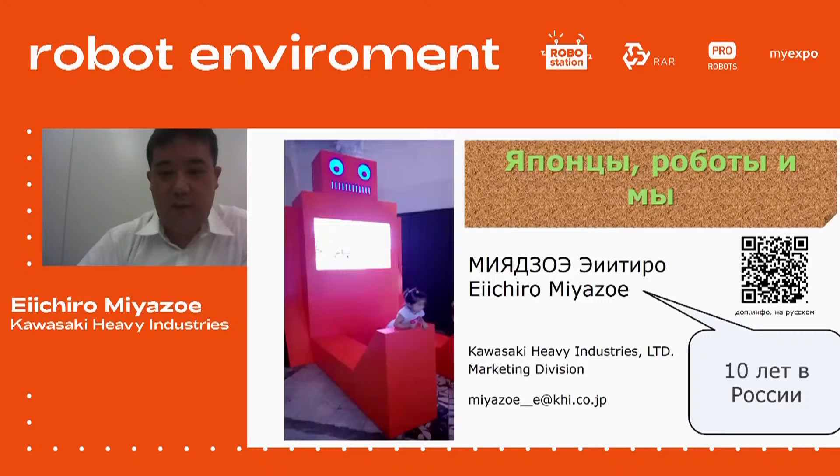You speak excellent, amazing Russian, Miyazoe-san, it touches straight to the heart. I've been living in Russia for 10 years, and I can speak about Russia a lot, but the topic is different. I would like to speak about the fact that Japanese manufacturers of industrial robots take more than 50% of the overall global market. Why? The question is why.

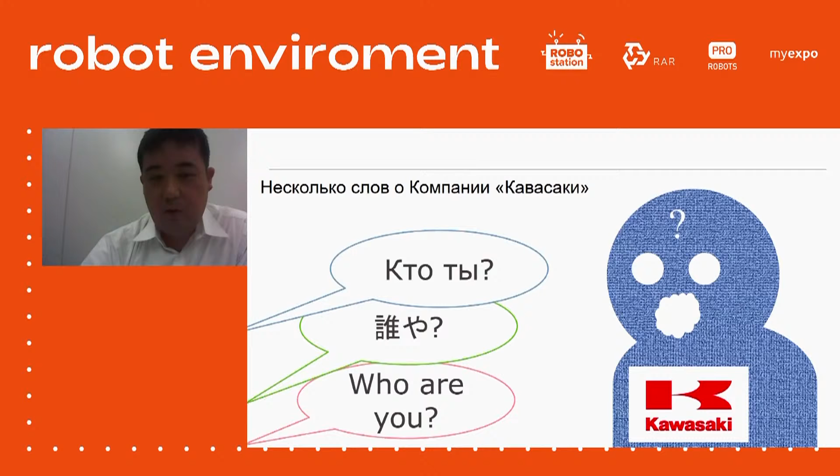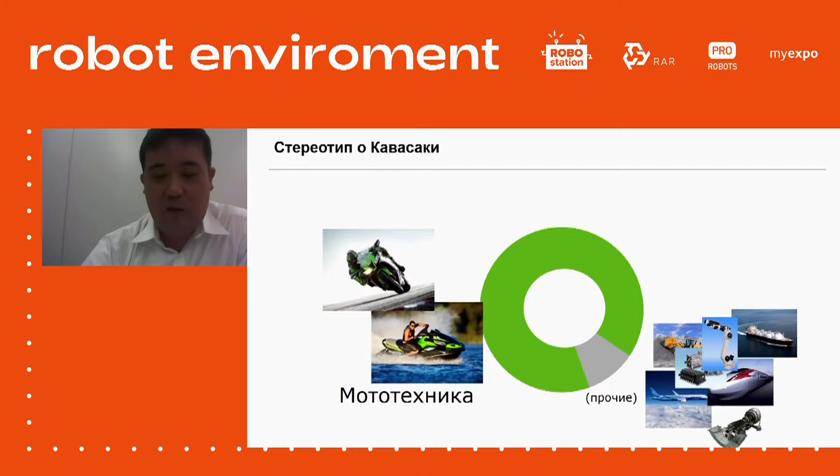And I would like to highlight who we are and what our company does. A couple of words about Kawasaki company - who we are, in 3 languages. Some say that the majority of Kawasaki products are about motoring devices - yes, the Kawasaki motorcycle brand is very strong, but our company is very multifaceted and our portfolio is very diversified. We manufacture ships, trains, airplanes and their components, different compressors and pieces of equipment. We construct plants and we work in the motoring industry.

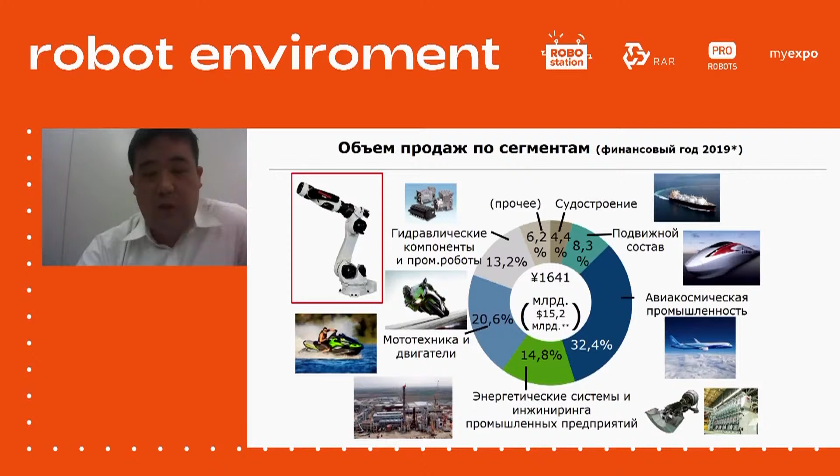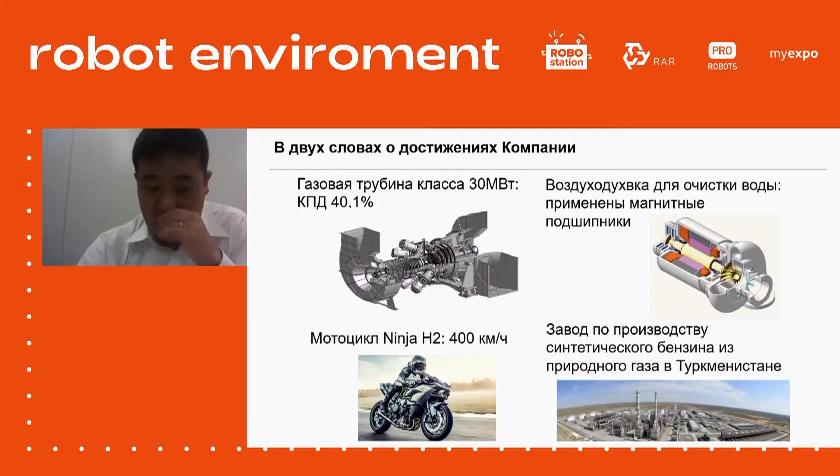But the most important thing for today's topic is that we manufacture industrial robots. We have gas turbines, we have motorcycles, we have water treatment equipment, and we are constructing a plant in Central Asia.

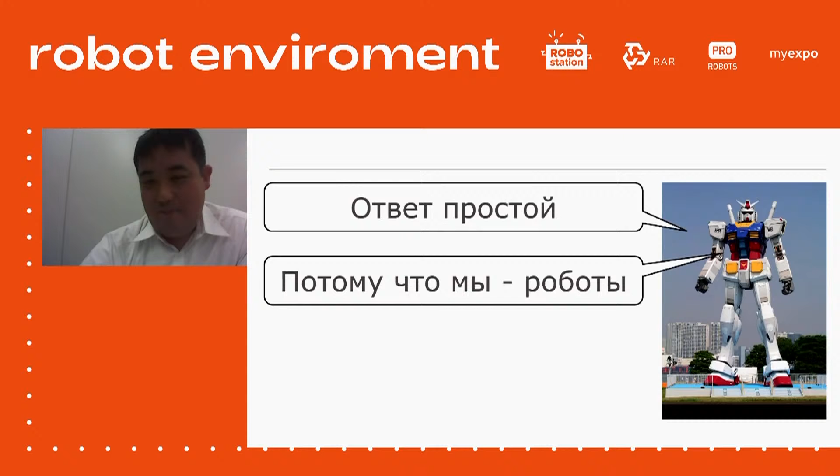So I go back to today's topic. The market share of Japanese robot manufacturers is more than 50%. Why? The answer is very simple - because we Japanese people are robots. No, that's not true, that's actually a joke. Take a look.

Japan has 124 million inhabitants - in terms of population, we're a bit smaller than Russia. In our industry we have automotive manufacturers Toyota, Nissan, and Honda, Kawasaki and Mitsubishi in industrial manufacturing, and in electronics we have Panasonic and Sony. Alongside that, we have manufacturers who construct industrial robots - us and our esteemed competitors, other manufacturers A, B, and C. So in our tiny, tiny country, we have both heavy industry and manufacturers of industrial robots.

We purchase robots from them and give them feedback, and they give us back better robots that are even cooler, even better. This is the logic chain that we have, and this is the main reason why Japanese manufacturers account for 50% of the global market.

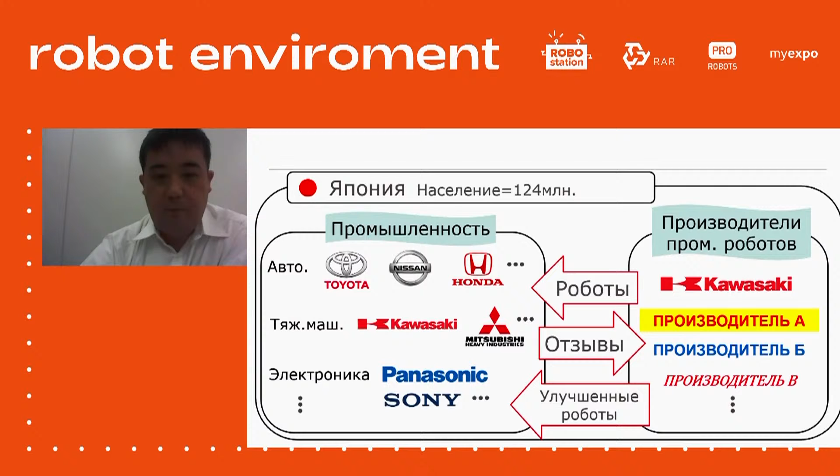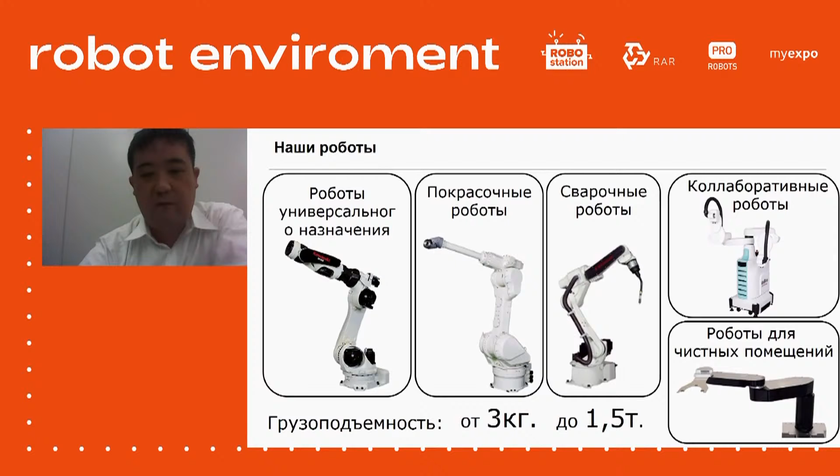And what about our company? This is the range of our robots. You can easily access this information on our website. Our robots can lift from 3 kilos to 1.5 tons in charge.

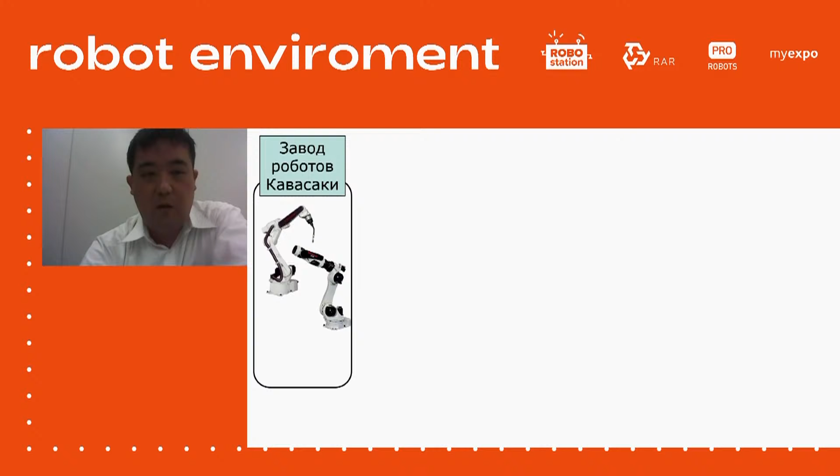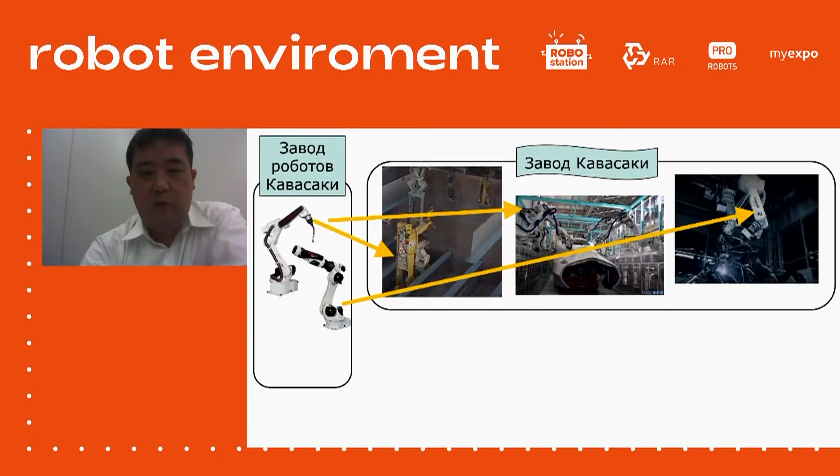Within our company, the situation mirrors the situation in the country. We have the factory where Kawasaki robots are being manufactured, but we also have our plant that manufactures different high-tech products, so we use our own robots to manufacture our own high-tech products. The plant staff provides us with feedback saying this is not working very well, this you need to improve, and so on. This is the loop of constant improvement, the way for us to guarantee it.

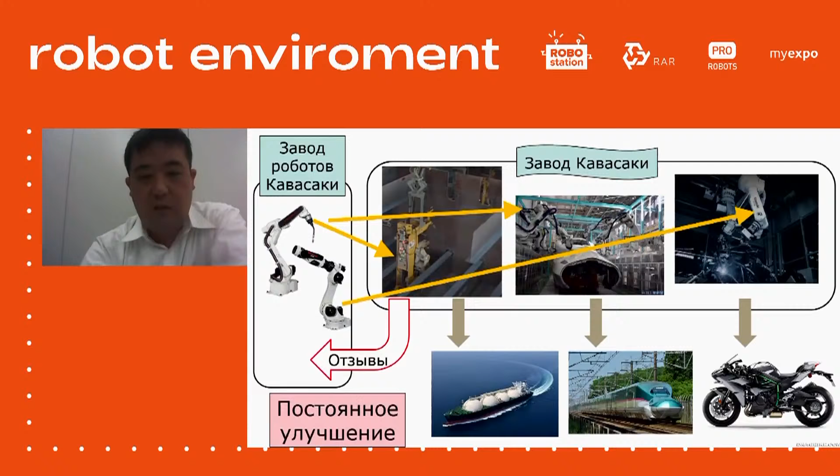So the same logic, the same chain is here. To my mind, this is the secret of success of the Japanese industrial robot manufacturers.

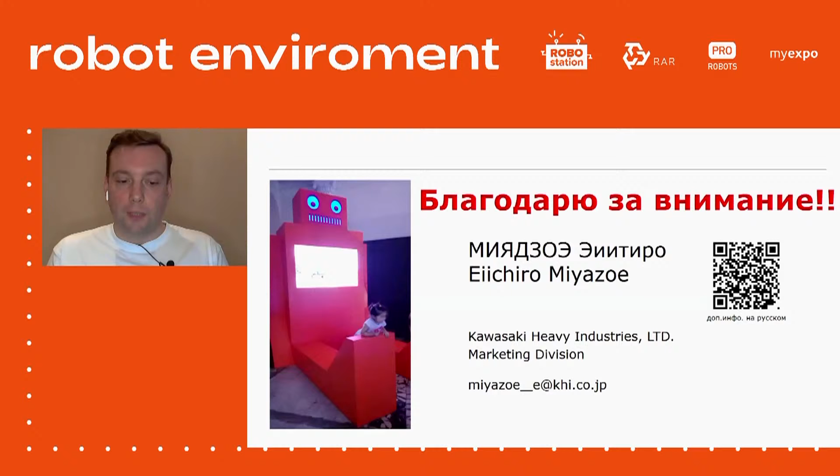Does it answer your question, Alexander? Yes, Miyazoe-san, wonderful presentation. Could you please elaborate on service robots? It's a very interesting topic.

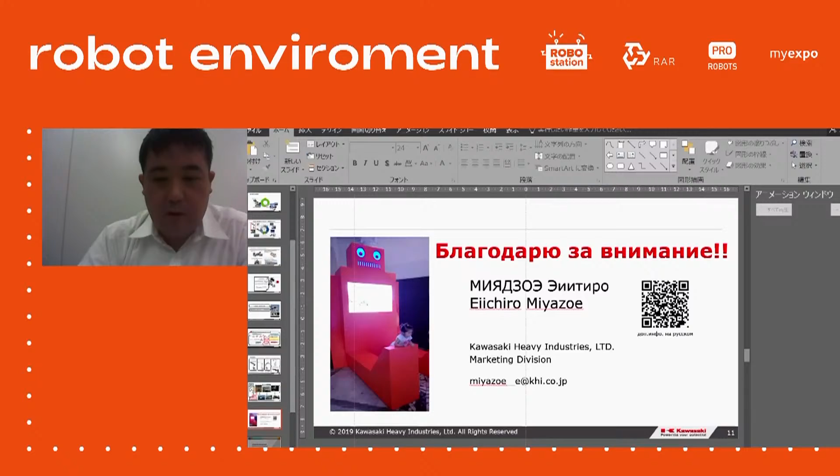Could you please turn on my first video? I had 3 of them. We will launch them in the order that you sent it to me. Could you please skip this one and go to the next one? Please continue. Yeah, oh yeah, this is the right one. Wonderful.

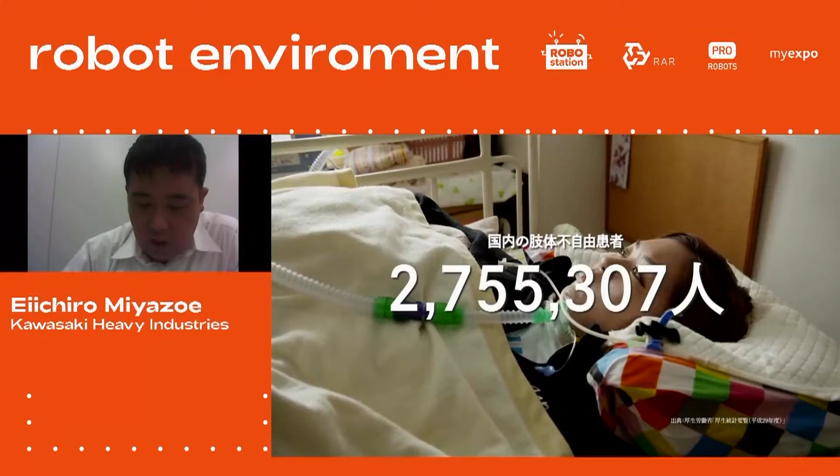This describes the situation with the service robot. It's the robot avatar, and people with disabilities can work remotely and take part in social activities. It's a cafeteria with robot avatars around.

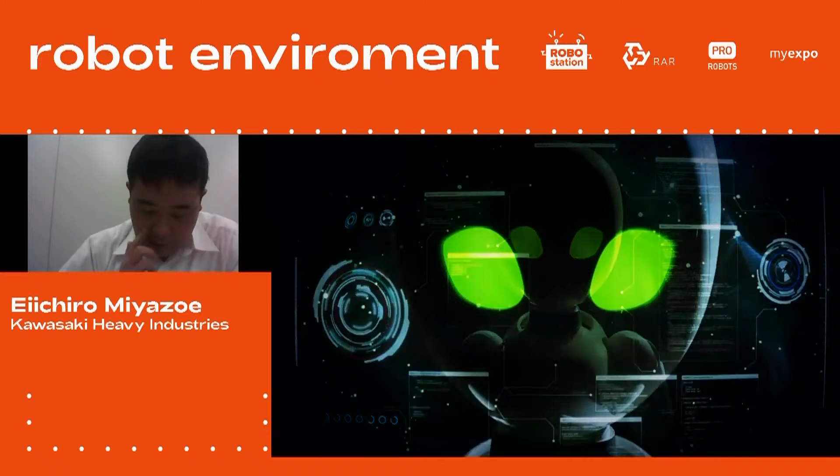I'm sorry, Miyazoe-san, can we launch the third video because it is more related to what we are hearing? No, this one is the right one. I'm sorry, this is the right one.

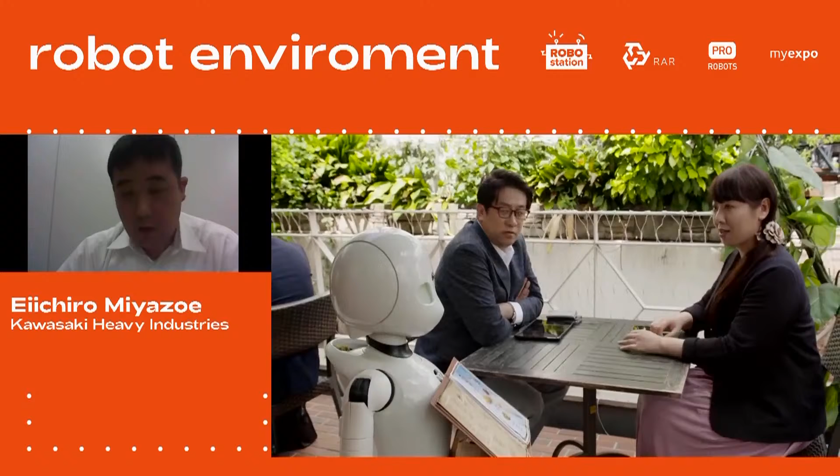9,500 people have a disease that prevents them from actually participating in social life. They are chained to the bed, and they can guide the robot using their eye movement.

These robots serve food and drinks in cafes and cafeterias, and people lying on the bed can see the world through the eyes of this robot. So the robot offers some coffee, brings the coffee, and receives a payment. They say thank you, and these disabled people can not only earn money, but be involved in social activity. This is a brief description of the situation with the service robot developed by this startup.

So in a nutshell, this is it. Thank you very much, Miyazoe-san.

I would like to say that maybe our viewers are interested to know why Japanese people tend to love robots. Maybe you can describe your attitude towards soulless items, and it will bring us to better understanding why Japanese people have different attitudes towards robots as compared to Russians, for instance.

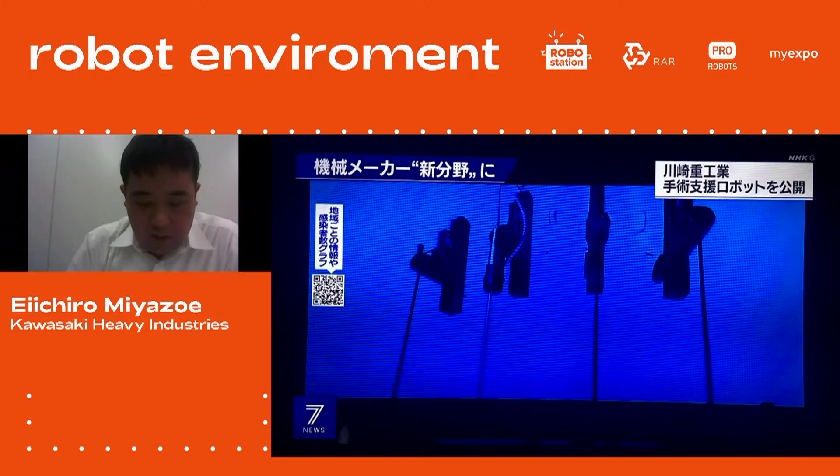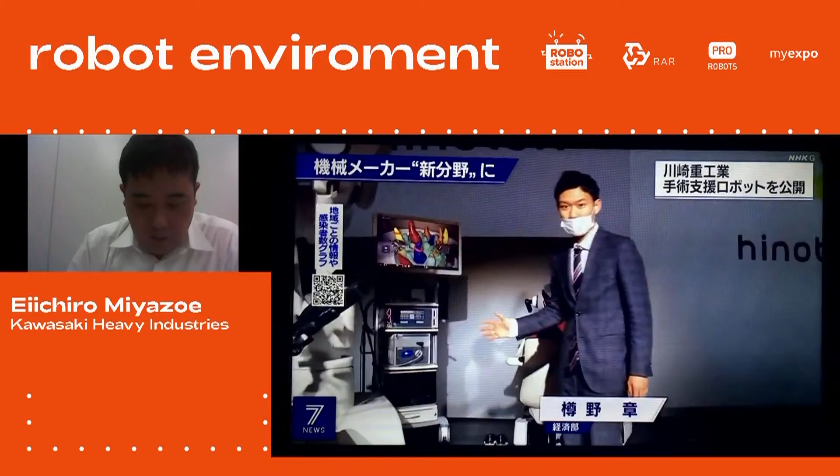This news came November 18th this year about our new innovative news on the heavy machinery industry in Japan. They keep diversifying their portfolio because their traditional products are in less demand due to COVID. Kawasaki, together with partners, produced the robot-assisted surgery system. It was know-how in robotics for such a surgery.

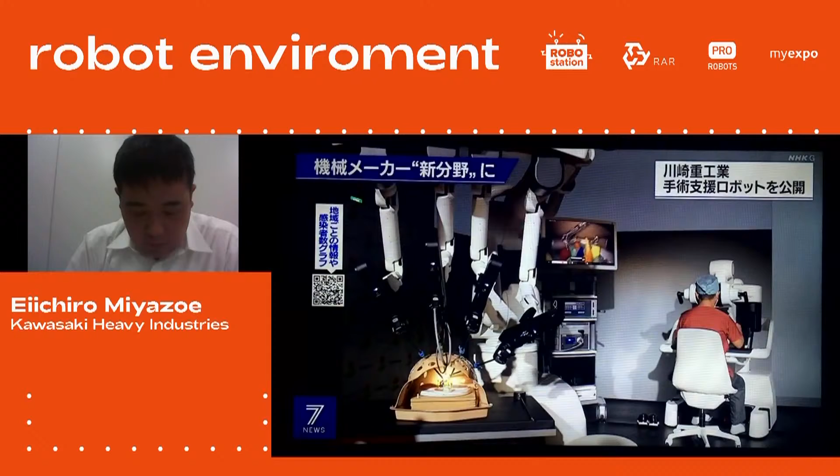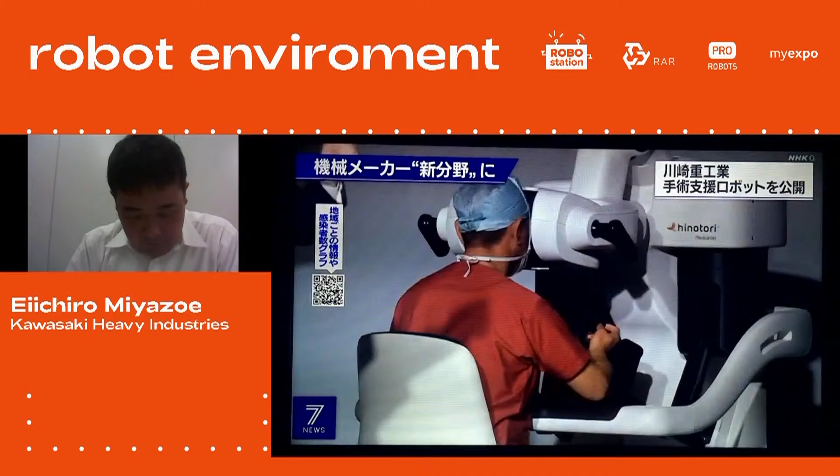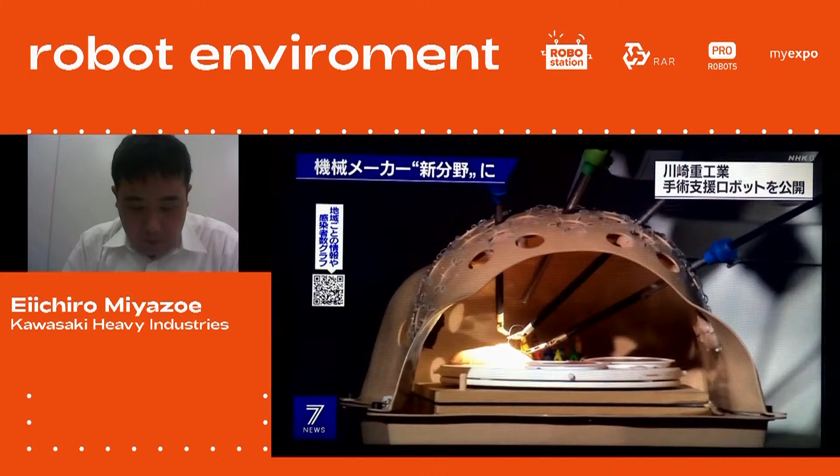And the results proved that the person who inspected our robots saw how smooth the robots work, just like real doctors. This robot is equipped with a function of remote control. According to the data of the Ministry of Healthcare of Japan, this is the first case when a Japanese robotic industry company obtained permission to produce a robot which could assist surgery doctors.

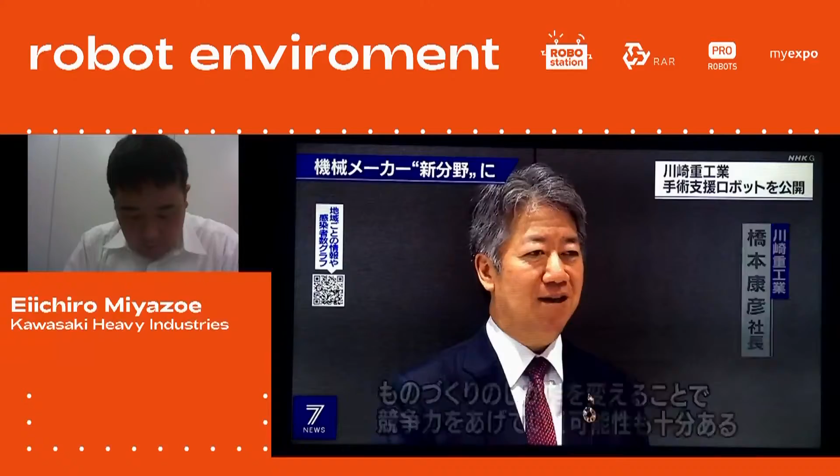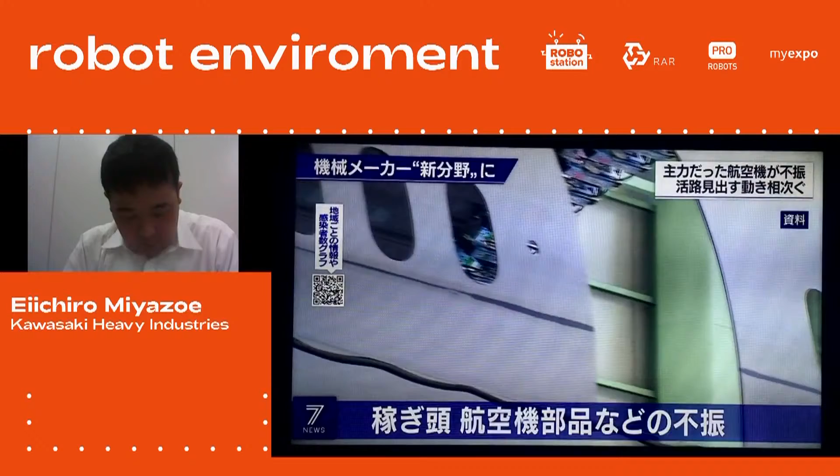Air and space industry components, which is a traditional area for the company - this year we faced a sharp decline due to the COVID situation, and it gave an impetus to strengthen other business areas, including medical robots.

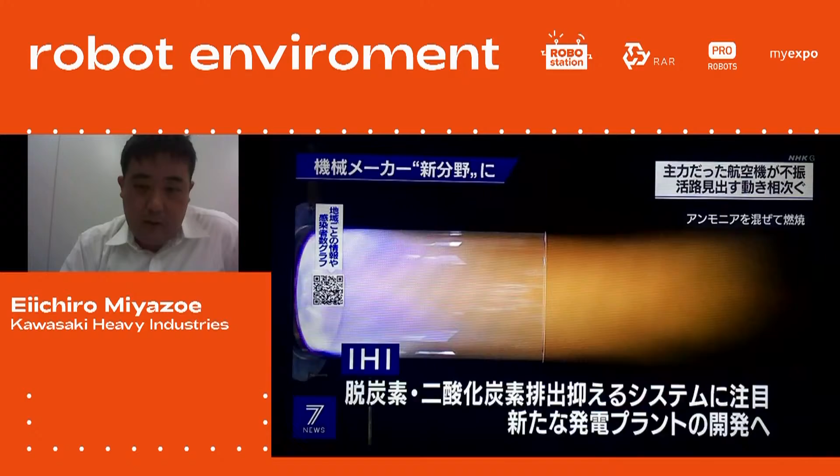And news not only from Kawasaki companies, but the situation with our colleagues from IHI. They produce robots, and they have problems with sales of traditional products as well. Now they are extending the business scope to survive in the post-COVID situation.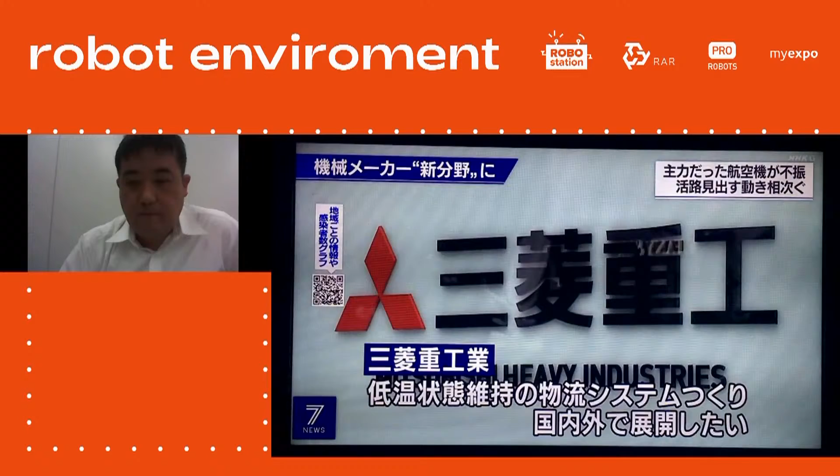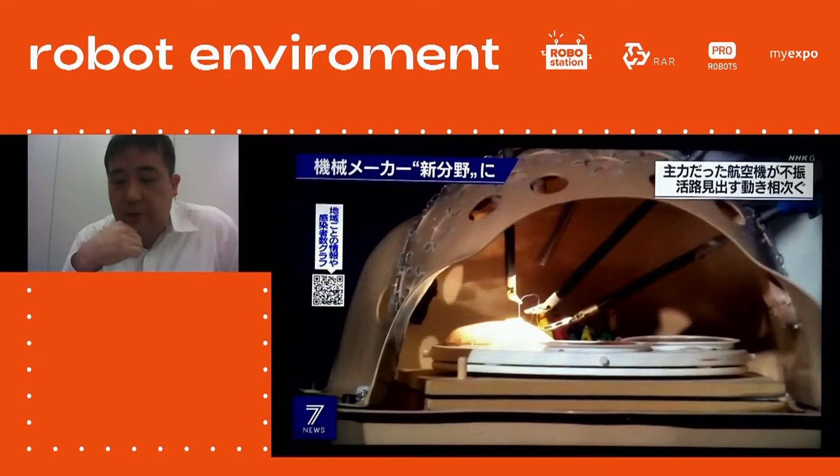In the middle of the video, you saw the machine and the person from our company. This is the president of our company who developed a robot for production of electronic components and semiconductors. When he was a kid, he dreamt of such medical robots which could undergo surgeries, and on his website he confessed that he dreamt about this because he was watching cartoons in childhood where robots were friends of humans.

Thank you very much, Miyazoe-san. Robots and people have to be friends and interact. First of all, robots are aimed at helping people.

I have a brief question. These manipulators, are they Kawasaki manipulators, standard manipulators within the surgery robot, or were these manipulators designed especially for this surgery? These are our robots' arms, robotic arms.

Of course, this requires a high level of accuracy, and since we have experience in production of robots working in sterile premises, which are used for production of semiconductors, etc., this experience can directly be applied for medical surgery robots. Thank you very much.

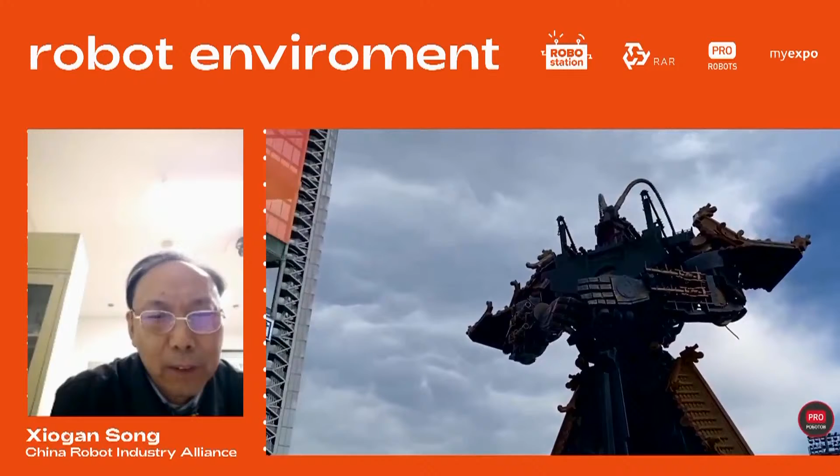First of all, the labor cost. Compared with the Southeast countries like Vietnam, Malaysia, the labor cost is much higher than that kind of country. That is, the labor cost used to be cheaper. That was 10, 15, maybe 20 years ago. That was the case, but it's not the case anymore.

Another factor is that there are so many different manufacturing sectors, like foundry, heat treatment - this kind of industry where the working environment is not so good, high temperature and heavy duty job. So that kind of job is no longer for the younger generation.

So two reasons: one reason is that the labor cost is higher than before. Another reason is that the younger generation is more likely to want to work in the office, and does not want to do the heavy duty jobs.

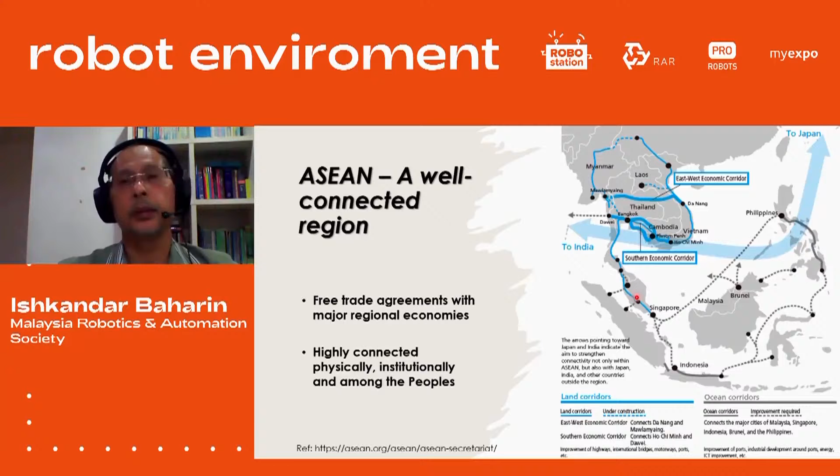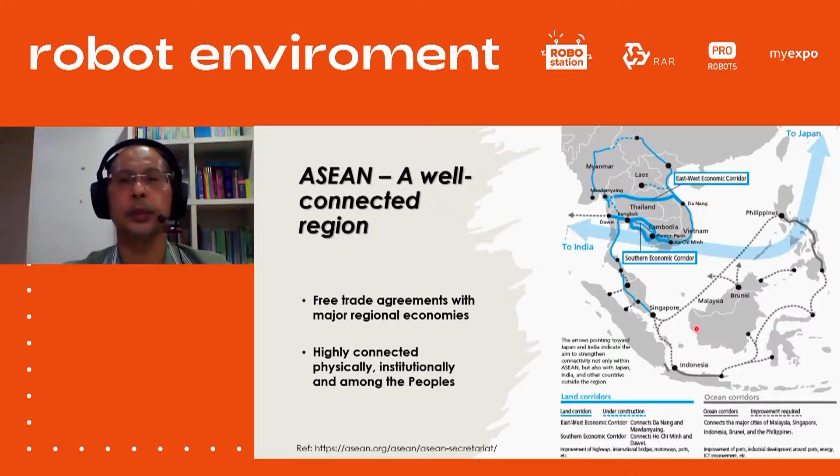This is Malaysia, a population of 30 million. Originally, there were a lot of robots used in factories by multinational companies. Now robots are being used in other sectors, because some Malaysian companies are also operating in other ASEAN countries. So we're seeing more robotics applications from Malaysia being transferred to Thailand, Indonesia, Vietnam, and also Philippines. So when our Russian market looks at the ASEAN countries, looks at Malaysia, try to think that Malaysia is a network connected to bigger countries, the ASEAN countries, which are well connected.

In terms of ASEAN, we are the 6th largest economy in the world. This is where Malaysia plays an important role in ASEAN. The first economy is the US, followed by China, Japan, Germany, United Kingdom, followed by ASEAN. We are also the 3rd largest market in the world in terms of population. China has 1.4 billion population, India has 1.3 billion, ASEAN has almost 635 million, followed by the EU and also the US. This creates a huge robotics market for Malaysia.

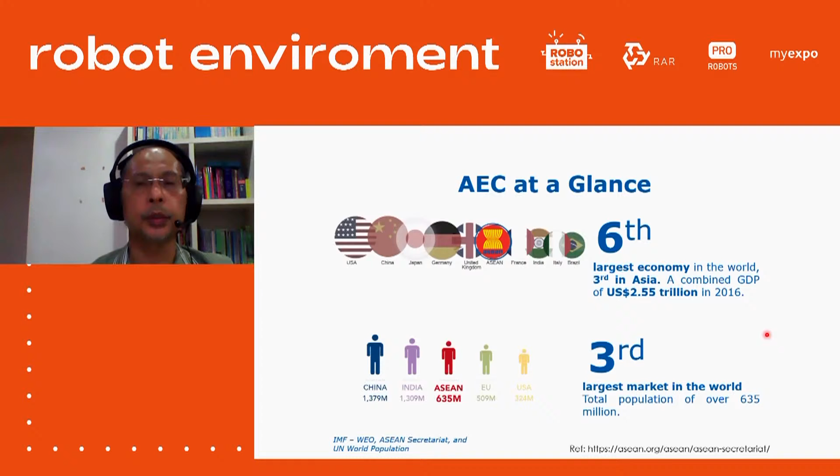In terms of foreign direct investment, there's a lot of investment coming from Europe, from EU countries, 33%, followed by within our ASEAN countries itself. So like Malaysia, we invest in Thailand, we invest in Indonesia, we invest in Vietnam. The same thing in US also, there's a lot of investment into ASEAN, followed by Japan and China.

When we do business in Malaysia, through Malaysia we can connect to the ASEAN countries, and we also have other collaboration agreements like under the ASEAN Free Trade Area, we have the ASEAN-Japan agreement, the ASEAN-China agreement, the ASEAN-Korea agreement, the ASEAN-India agreement, and also the ASEAN-Australia and New Zealand agreement. Recently we have just signed the RCEP agreement, and also we are now negotiating the ASEAN-Hong Kong agreement.

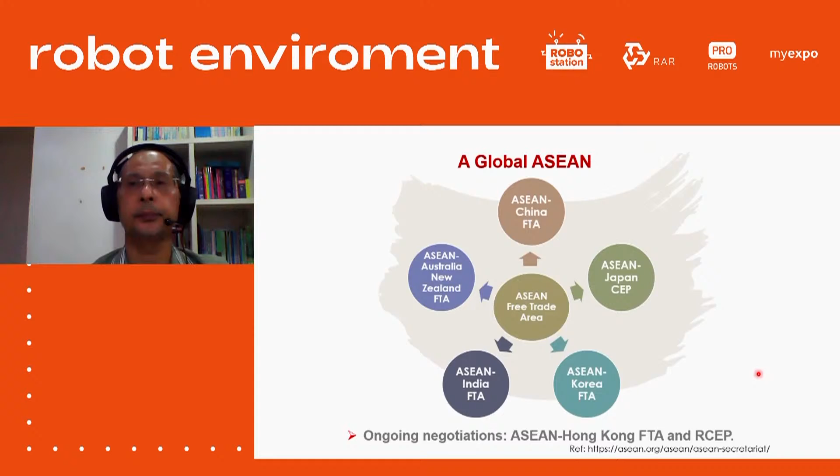Very quickly, we are the biggest crude palm oil producer, so we are seeing a lot of robots going to be applied in the plantation sector. In natural rubber production, Malaysia is the greatest exporter of rubber, especially now during COVID, so there's a lot of production and a lot of robots in this type of factory. Also in agriculture, there is a lot of rice production, so we are seeing more and more robots being applied in the production of rice. And also in the seaports, there's a lot of logistics robots now at the ports.

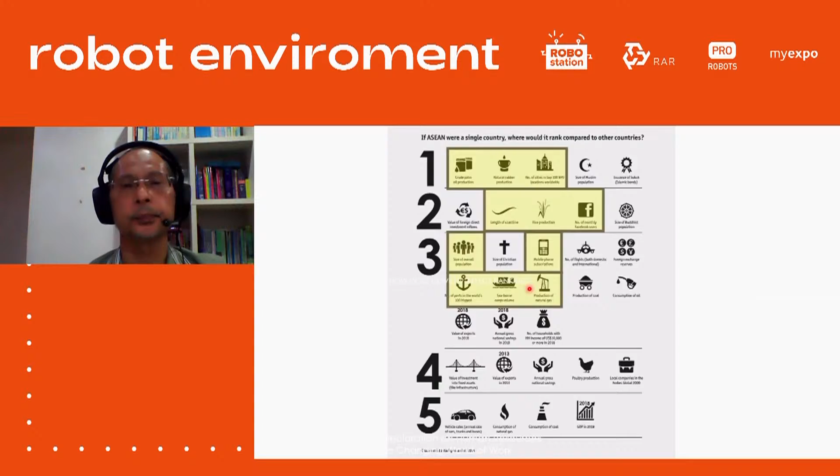Just to share in terms of where robots are being used in ASEAN, for example in Singapore, 20% of the GDP contribution is in manufacturing, so robots I believe are a lot used there. But for Malaysia, these are the main users of robots, which is mainly in manufacturing.

Robots are being used in the manufacturing sector. Number one is the automotive sector, that's the main user of robots. Number two is electrical and electronics. Number three is pharmaceutical. Number four is the food industry.

So if I can share, what is the reason why people in Malaysia, or maybe in ASEAN in general, want to use robots or want to go into IR 4.0? 70% are saying that they want to improve their business process and productivity. 41% because they want to improve their customer experience, because when you use robots, the products are more quality and more accurate. 36% use robots or IR 4.0 because of cost reduction. And 28% is because they want to develop new revenue streams, because when they use robots, they can produce other products, other high mix, low volume kind of activity.

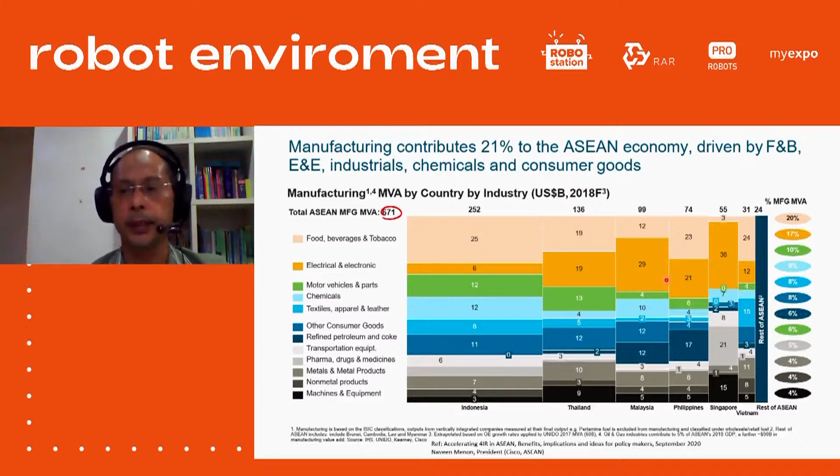In terms of what is at stake, in Malaysia we know that if we don't use robots now, there's difficulty in labor and also competition in technology in IR 4.0. So in ASEAN countries there's a lot of support for factories to adopt IR 4.0 or robotics, because if you don't do this, about 250 billion of our opportunities will be lost. By 2028, predictions by the World Economic Forum, UNIDO and others show this is the opportunity loss if you don't convert to robotics.

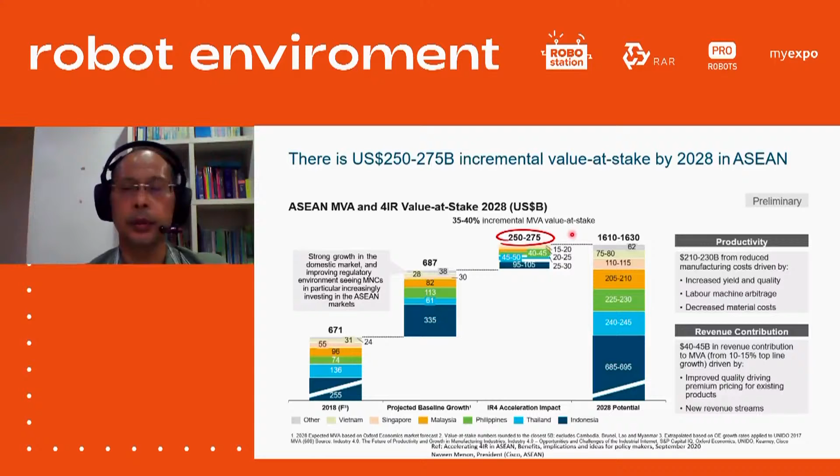At the same time, because we introduce robots, a lot of people will be displaced. For example, in Malaysia, because of robotics, automation and IR 4.0, we predict 1.2 million will be out of job, which is 7.4%. In Indonesia, about 9.5 million will be out of job, which is 8.1%. In Philippines, about 4.5 million people will be out of job, which is 10%. So if you look at the top six ASEAN countries active in manufacturing, everybody will be losing workers' jobs, but it doesn't mean they are truly lost - they will be retrained and redeployed to other sectors as factories become more automated.

So this is the next program.

Finally, I would like to share one model where Malaysia and Korea are collaborating, how Malaysia robotics and Korean robotics are now collaborating. Between Malaysia and Korea we have a government to government agreement, the bilateral industrial cooperation agreement, between our Ministry of Trade and the Ministry of Trade of Korea.

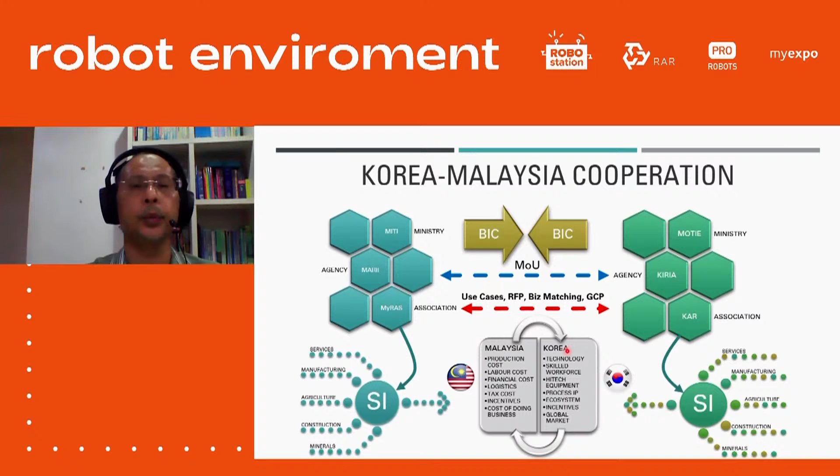So we are looking at five sectors: services, manufacturing, agriculture, construction, and minerals. I would like to invite our friends from Russia, and maybe from China and Japan, to consider this bilateral industrial collaboration model to explore robotics collaboration between our respective countries, where through this collaboration framework, with Malaysia we can enter into the ASEAN market.

So I think that's all that I can share.

Thank you, I will stop there. I have a very short video just to share with the audience a bit about the digital transformation that is going on in ASEAN countries.

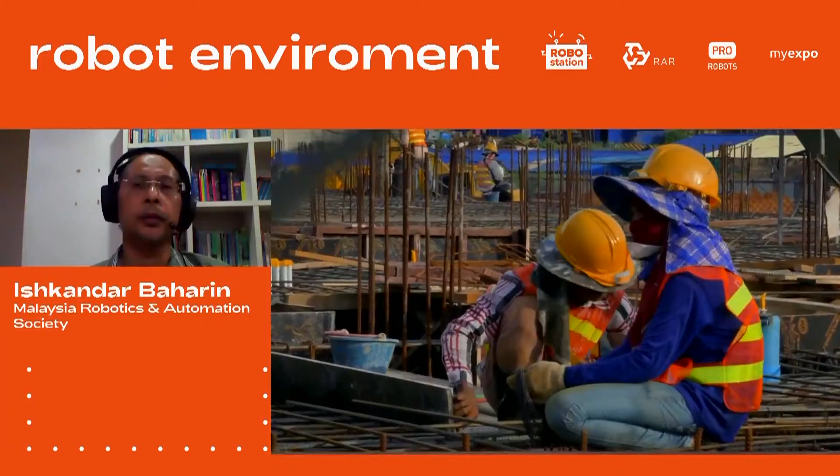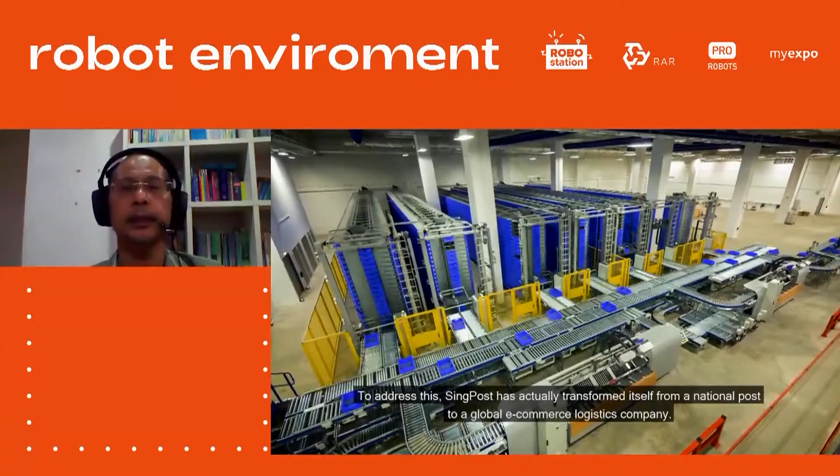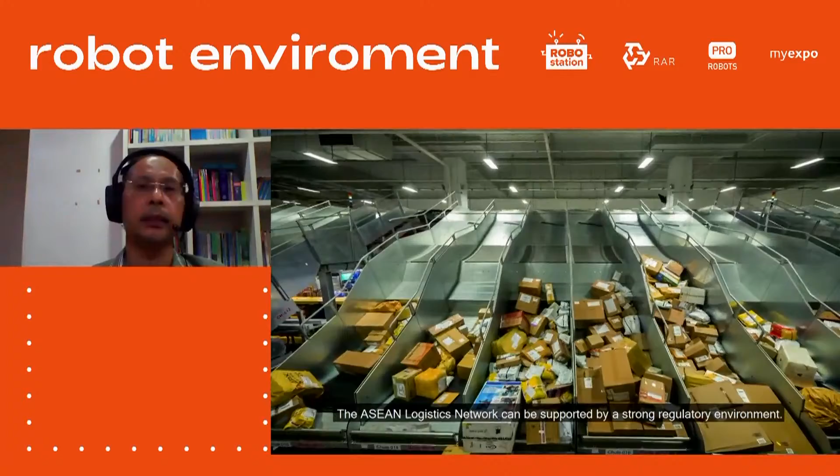So this video, because when you talk about robotics, the digital network is very important. Now Malaysia, Singapore, Indonesia have all developed a common digital framework such that our manufacturing and connectivity is good. Starting from Singapore - I think our friends from Singapore will talk more on this - Singapore is championing the logistics sector, because the logistics sector uses a lot of robots and digital technology. Connectivity is very important, so Singapore is like our logistics hub for the ASEAN countries.

In Malaysia we rely on the network, the port services of Singapore.

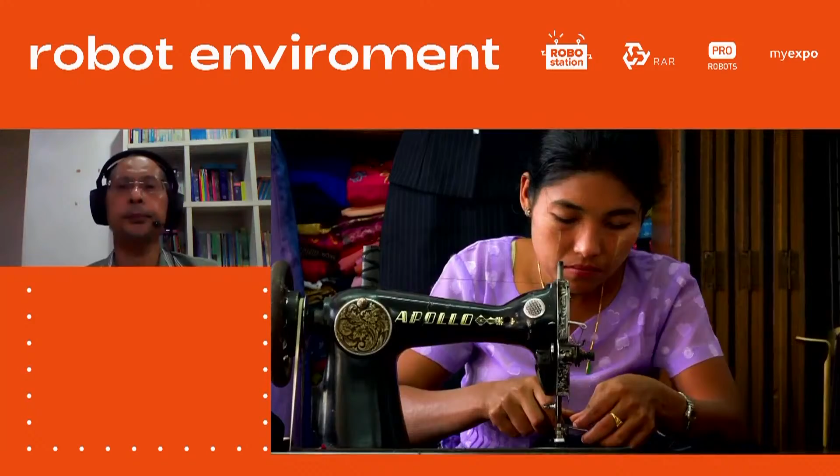The next one is agriculture. You will see that now a lot of people are using their handphone as the means of communicating with outdoor activities. So we are seeing in Malaysia more people using their handphone to control robots.

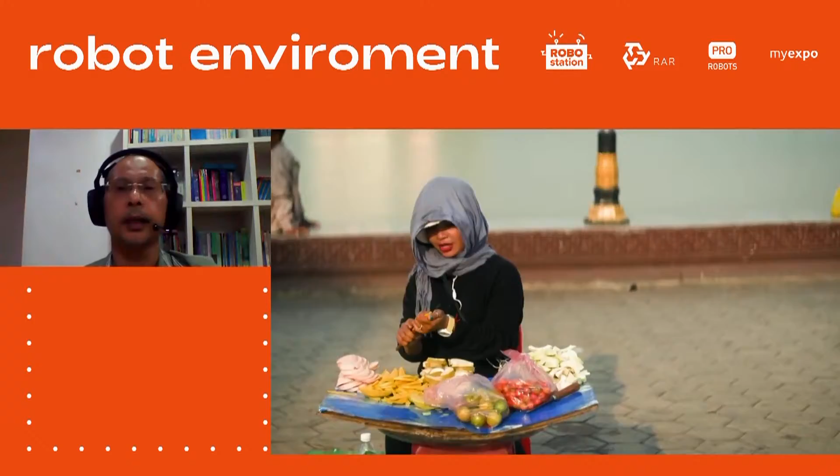These are robots outside the factory. For example, robots are being used for drone applications and for supermarkets. This young generation will use their handphone to communicate with all these robots, just like traders are now using handphones. In Malaysia, there is now what we call the cooking robot, slowly being developed by the young generation. Malaysia is famous for our food, so we are going to see a lot more cooking robots soon.

The other one is SME. Malaysia has been given the responsibility to develop the SME for ASEAN. So you will see that a lot of the experience of SME in Malaysia is now being exported to the ASEAN countries. I myself am very active in helping Malaysian local SMEs adopt robots, to use robots. So if any of the Russian, China or Japan delegates would like to do business with SMEs, you can talk to MyRAS, and we can share the SME experience in the ASEAN countries as well.

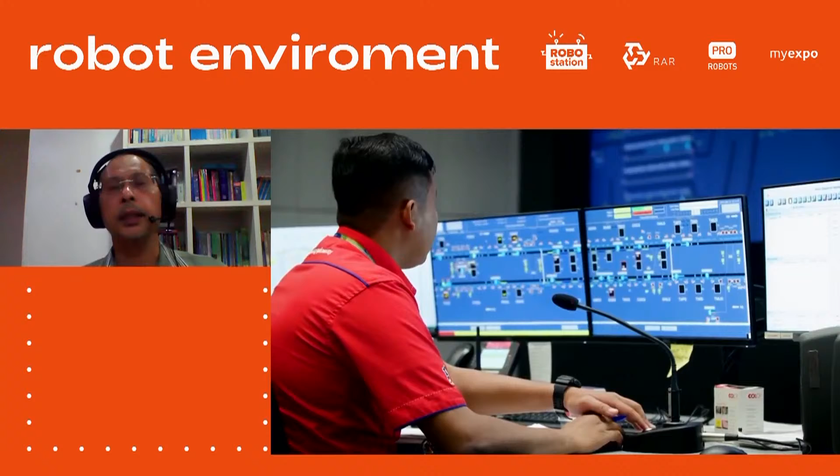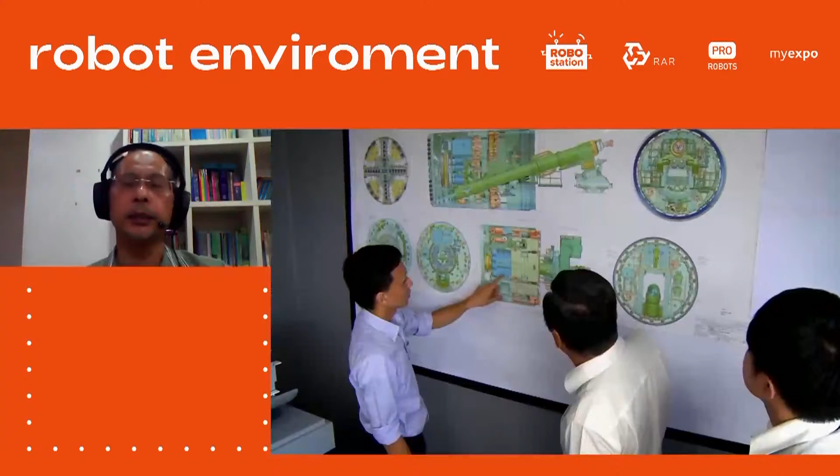The other one is infrastructure, things like the highway and the transportation, all of which is now well connected. So again, this is another application where robots are being used.

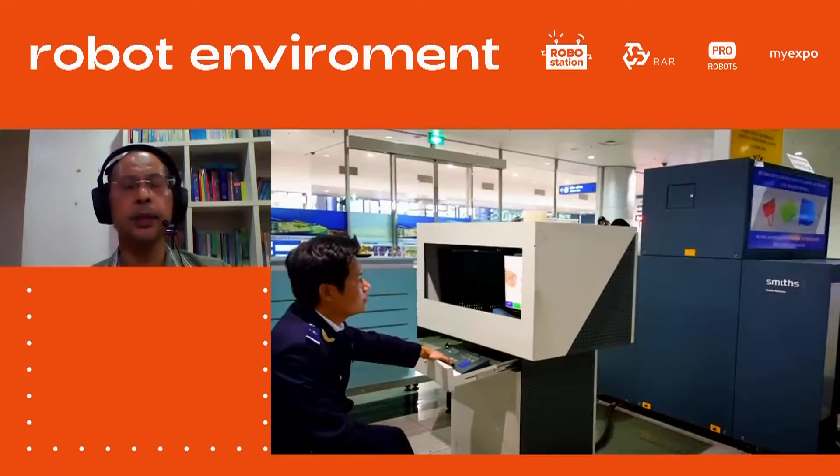The other one, finally, is education. Education is very, very important. You will see that education now involves the movement of students between the ASEAN countries, and also for training. So Malaysia will go to Vietnam to get training in software engineering and so on.

I think that is what I would like to share. I think that was more towards the end. So in summary, when you talk about Malaysia, you talk about ASEAN, and when you talk about ASEAN, you talk about Malaysia, meaning there's a tagline we call Malaysia Truly Asia. So when you have Malaysia, you have the ASEAN experience, the Asia experience. Thank you, Alisa, maybe it's a bit long, so thank you very much.

One thing I'd like to start off with is in 2017, Singapore commissioned a Committee on Future Economy. It was something we felt was necessary because we see the wave of automation and robotization coming at great speed, and we felt it was important for us to transform to a future economy. This committee comprises representatives from more than 200 companies in Singapore and across government agencies.

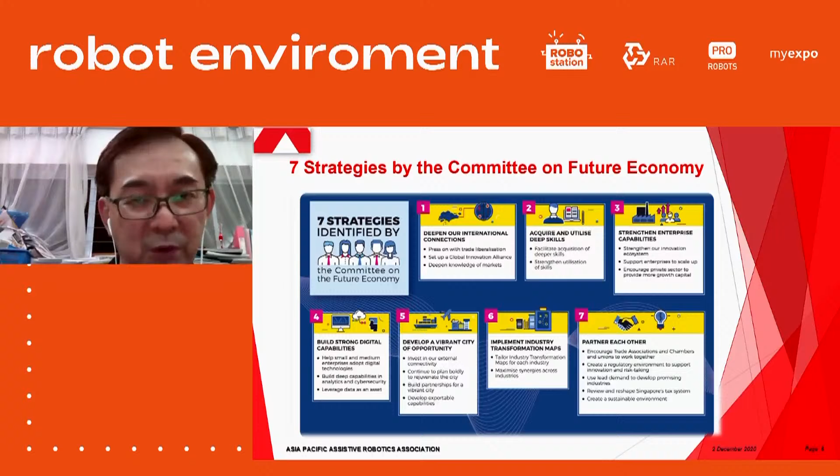It developed 7 strategies which we felt were important for Singapore's transformation. These 7 strategies are shown on the slide here. But what is important, if you look deeper into each of these strategies, you will recognize that they require automation and robotics, and that was really what we felt was important. As a result, we created Industry Transformation Maps, targeting 23 sectors in total, trying to understand where each of these sectors requires automation, where each requires robotics, and we started to apply accordingly.

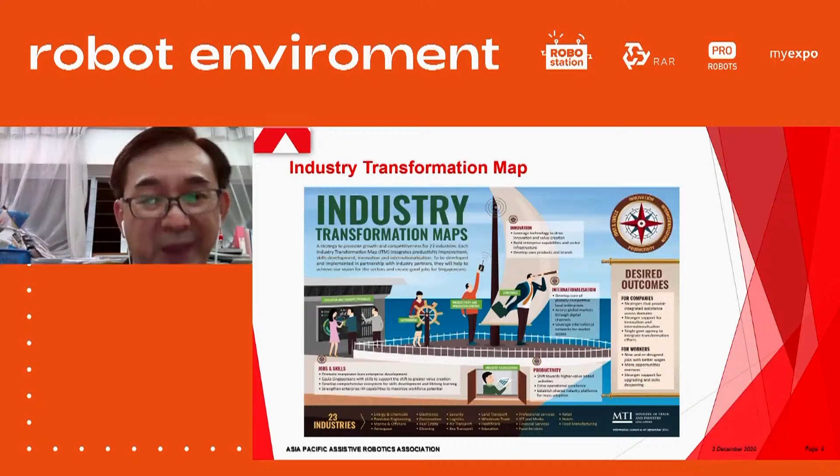Of course, some sectors will require less automation and robotics, some will require more. If I could refer back to the statistics shown by Iskander, you will see that depending on the industry and sector, the level of automation would differ. So for sectors already automated, mainly in logistics and manufacturing, we wanted to improve and advance the level of robotics deployment. On the other hand, where we see sectors with very little or no deployment, we want to introduce the technology. We believe this way we lift the entire economy to a level where they can fully automate.

In doing so, we also recognize it's important that AI plays a part, so we did not separate AI and robotics. In fact, we integrated both together and believe the whole space of making robots intelligent, having smart machines, is important. We see robots go beyond the factory, and service robots become a very important part of how we want to drive our future economy.

...productivity increases, and productivity is a very interesting word. Because when we increase productivity, there are two things you can do today: one, increase the number of manpower, have more people join the workforce and contribute to productivity; the second is you work longer hours, putting in more time and effort to increase productivity.

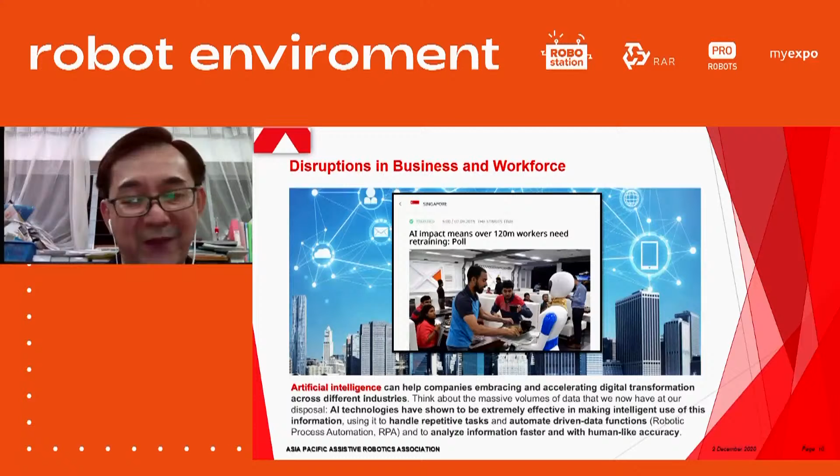In Singapore, we believe productivity can also be increased by supplementing the digital workforce. Hence, robotization becomes a very important component of the whole transformation process. We understand there will be a situation where the workforce has to be retrained and made available to other sectors, perhaps upskilled to the level whereby they spend more time supervising and managing the robots. Hence, we created a program around how the workforce can be resilient, allowing our workforce to have a lifelong learning program and continue to retrain themselves to adapt to the new environment.

So all three components work very closely together, and they are all led by our Foreign Minister, Dr. Vivian Balakrishnan, who himself is a very tech-savvy individual. And we find that it is very important that all this come together in order for us to move our industry, our economy forward.

So remembering, two-pronged approach. One is to advance the current automation level so that we use new age technology, smart robots in the industry that are already using robots. Two, to introduce robotics to sectors which have not or are thinking about using robots.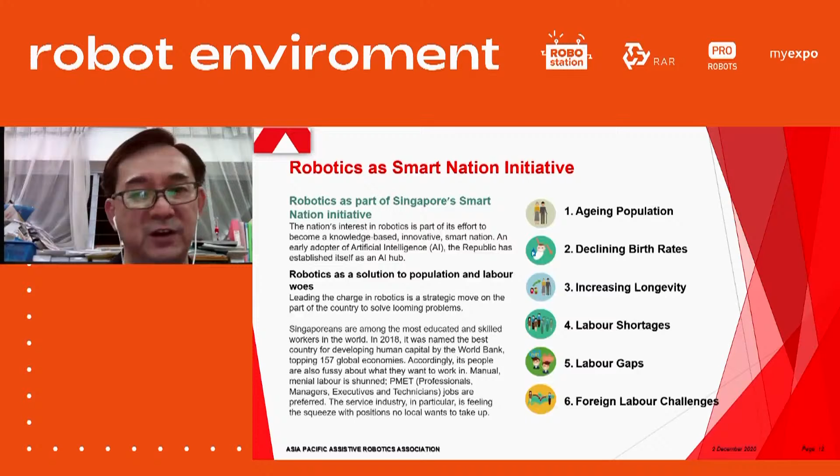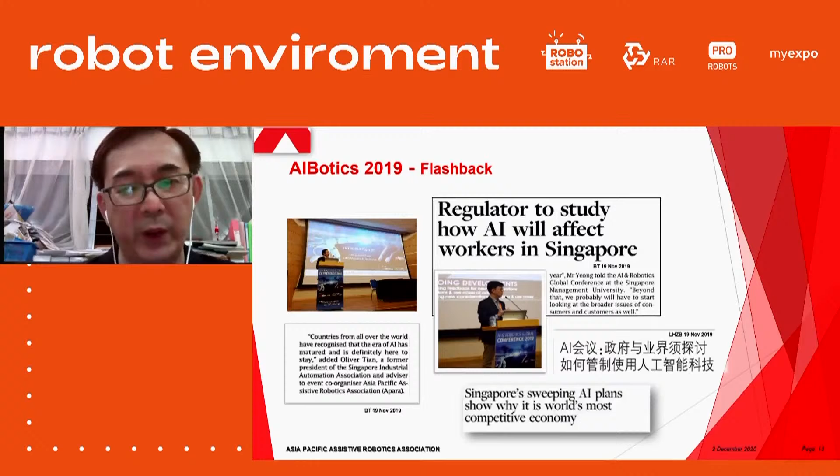APARA and SIAA actually went into a discussion with the government, and last year, right in November, we drove a program called AIBotics. AIBotics, which stands for AI in Robotics, putting the two together, and the regulators in Singapore are looking at how, with the introduction of AI in robotics, that's going to impact, and that's how we need to change the way we work, live, and play.

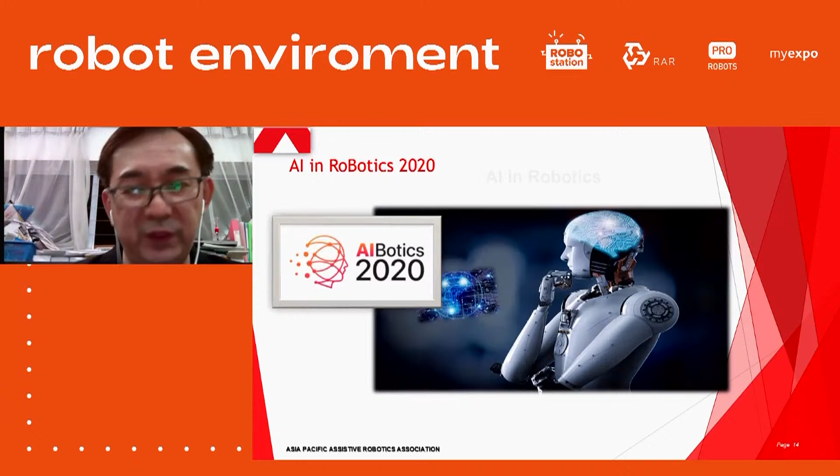And this year, we have just successfully completed our 2020 edition of AIBotics. Together with this, we spent quite a bit of effort to actually educate the public around the introduction of robotic technology. And we have, with the local paper, the Straits Times and the Business Times, introduced a series of articles and contributions to help people understand that robotics can be applied in all different sectors of the economy.

Hence, we believe we are on the right track. We believe we need to upskill and build smart citizenry, smart nation. Smart nation will not be successful if citizens are not smart. Hence, we spend quite a bit of time educating the masses around the technology and enabling them to use the technology.

So, if I look at what I just suggested here, there are multiple areas that we've applied robotics. Manufacture, that's really our space, and we've gone into advanced manufacturing to adopt very smart manufacturing technology into the factory space. We also started to introduce robotics into the F&B sector and retail.

We do see the use of robotics in the restaurants. We do see the use of robotics in the retail sector as a concierge. We also see robotics in the hospitality sector in terms of hotels, where it can greet and meet visitors and clients to the hotel. We also see the potential of robotics in education. We are trying to look at how we can best introduce robotics to help with the education program.

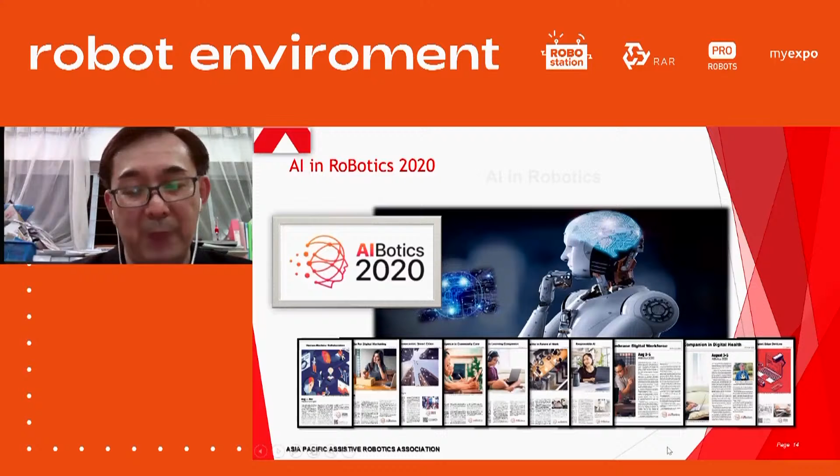So as you can tell, we are spending quite a bit of time in different sectors, 23 of them in total, trying to see how best we can help these sectors become successful in the deployment of robotics. That gives you a global picture of how we are introducing robotics in Singapore and the different sectors we've applied robotics to. I'll hand back to the host for the next set of questions so I can continue to explain more about the landscape in Singapore.

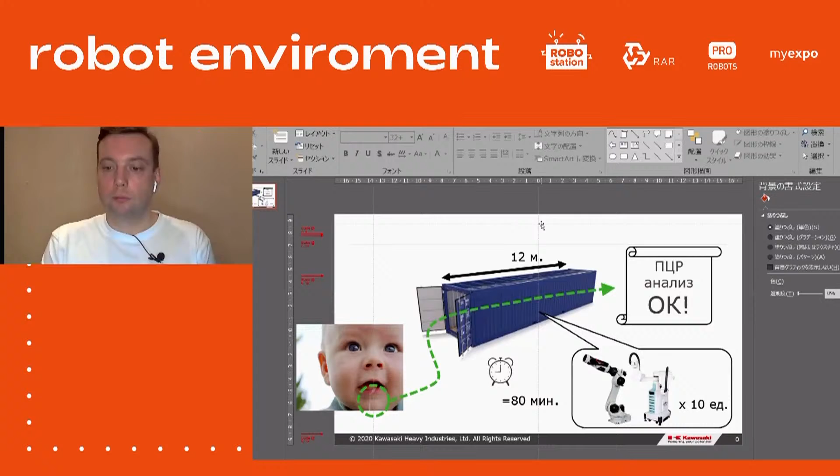Yes, sure. Actually, we have developed PCR COVID tests using robots. It can all be placed in a container 12 meters long, and it takes 80 minutes, one hour and twenty minutes, without people, though there are some functions still performed by people. We give the sample, run the speed test, and after that the result is provided to the person. We plan to locate these stations in airports first in Japan, as of now.

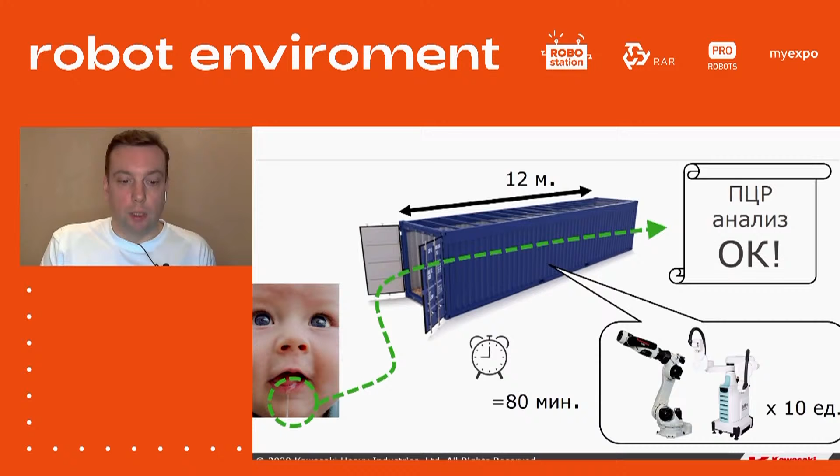Iskander, what about the COVID situation in your country, and how are robots helping to fight COVID? Yes, unfortunately COVID is winning at the moment.

Thank you, Alex. In Malaysia, I'd like to share two experiences. One is normal robots — we are now pushing robots in hospitals and also in the service industry. There are a lot of mobile robots, a lot of disinfectant robots. Unfortunately, I didn't manage to bring some videos, but maybe next time I'll share more. Interestingly, in the manufacturing sector, we're seeing collaborative robots being introduced, because most factories want to see fewer people working on the factory floor, fewer people touching the products. So the solution is to bring in collaborative robots for welding, painting, polishing, and so on. Also, the spacing of workers is now distanced, so with fewer people able to stay in the factory, mobile robots and collaborative robots are the two types now being sold very actively. This is the Malaysian experience.